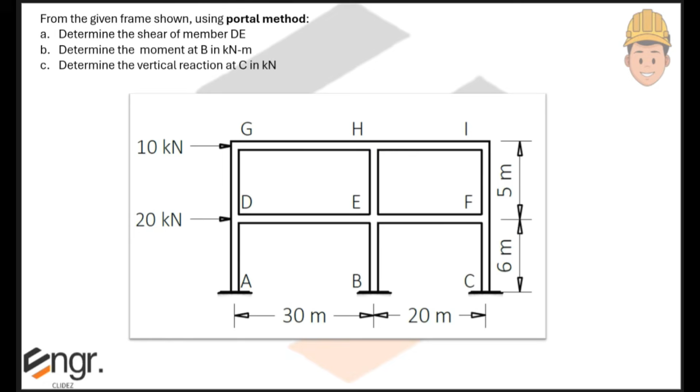So, before we discuss the conventional method, we will first outline the assumptions sa portal frame method. So, first, the bending moment is assumed to be 0 at the mid-height of each column and at the mid-span of each beam. So, di ba yung bending moment is 0 if there is a point of inflection. So, kapag sinabing point of inflection, yung assumption natin dyan, lahat ng mid-height ng column, then yung mid-span naman ng beams, lahat yan, lalagyan natin ng internal hinge. Kasi kapag merong internal hinge, yung bending moment 0, so that would signify a point of inflection.

So basically, sa lahat ng midspan ng beam, lalagyan natin ng internal hinge. Lahat din ng mid-height, lalagyan natin ng internal hinge. So kapag nilagyan natin ng internal hinge yung kada mid-height saka mid-span, then masosolve natin siya just by using static equations kasi magiging determinate na siya.

Then next, the total lateral shear at each story is divided among the columns in such a way that interior columns resist twice as much shear as exterior columns. So, itong mga nasa dulo, ito yung tinatawag natin na exterior column. Then, yung interior column naman, yung mga columns na andito sa loob. So, what if, sir, may 4 na columns? Let's say, ganito yung configuration. So, itong dalawa, yan yung exterior columns, tas ito namang dalawa, ito yung interior columns.

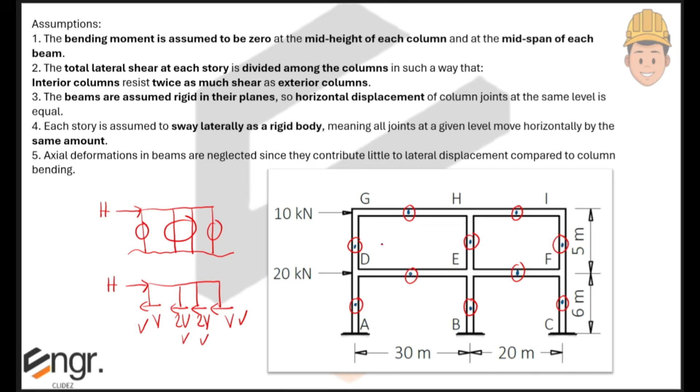So, one of the things that you have to remember, kapag magsosolve ka using portal method, yung first mong makukuha is yung shear value. But kapag cantilever na approximate method, yung first mong makukuha is yung axial force. So, yan lang yung difference nila. But nevertheless, yung assumptions na merong internal hinge sa mid-height ng column at sa mid-span ng beam, same lang. But yung behavior sa cantilever will be discussed in another video. Yung assumptions 3 to 5 naman, hindi yan necessary sa solving natin, but nilagay ko na lang dyan para malaman nyo talaga kung ano yung assumptions natin sa portal method.

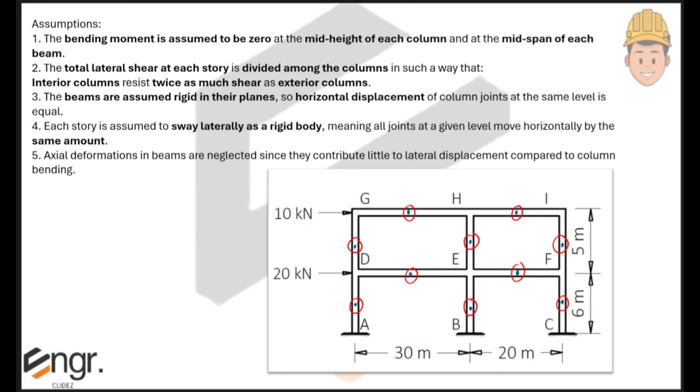Anyway, let's proceed sa solving natin. So yung gagawin natin is we will pass cutting sections dito sa first story, then next naman sa second story. Teka lang, may natanggal na internal hinge. May internal hinge dito, mid-height ng column EH. So, we pass a cutting section sa first story. We cut through the internal hinges. Then, sa exterior columns, merong V. Then, sa interior naman, merong 2V.

So, if we isolate the top part, then we can sum up forces horizontal. Now, we have 10 and 20, both acting to the right. So, positive yan silang dalawa, 10 plus 20. Then, equate natin sa lahat ng forces acting to the left. Naturally, yung shear forces would act to the left to resist the lateral loads. Kaya yung direction natin, ginawa na lang natin to the left. But what if yung lateral loads pa ganyan? Kapag to the left yung lateral loads, then yung shear naman will be acting to the right. Ilagay na lang natin yung tamang assumption agad. So, equate natin V plus 2V plus V.

Then, we can solve the value of the shear force, which is 7.5 kilonewtons. So, itong exterior columns, 7.5. Tas yung interior column naman, 2V yan. So, 2 times 7.5, that would be 15, yung shear force niya.

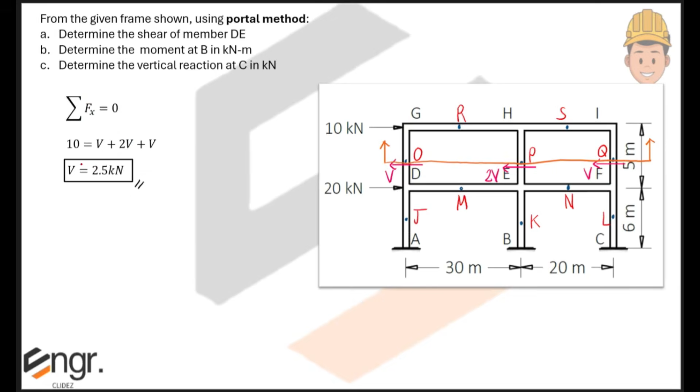Tas dito naman yung GH, distance niya is 30 meters. Kalahati ng 30 is 15. So we have 15 here. Then, sulat natin yung internal forces. Sa point O, we have our internal shear force as well as our internal axial force. Then, yung internal shear force na gagamitin natin is yung na-solve natin kanina. Diba, yung V dyan is 2.5 kilonewtons. So, sa exterior column yan, 2.5 kilonewtons.

Then, for the axial force naman, always assume at first na in tension siya. So, we draw the axial force away from the joint. So, ito yung joint O acting away. Yan yung axial force natin sa point O. Kaya yung label dyan is A sub O. Then, sa point R naman, meron ding internal axial forces. So, we have V sub R and A sub R.

Yung V sub R, assume na lang natin na upward. Anyway, hindi magmamatter yung assumption natin dyan kasi kapag negative yung result, it just means na mali yung assumption natin. Then, A sub R naman, since axial force yan, always assume tension. Bakit tension yung assumption? Tension yung assumption para kapag negative yung result, then alam na natin na in compression yung member. Then, always remember na internal hinge yung connections natin. So, if we transfer to another member, kailangan opposite yung directions.

Di ba ito yung upper left side? So, if we proceed sa middle, let's say ito. Let's say ito yung point R, ito yung H, ito naman yung S, saka P. So, opposite dapat yung direction kapag lilipat ka na ng bagong member. So, if AR here is in tension, then sa kabilang member, AR will be also in tension but acting to the left. Then, sa shear naman, if this is acting upward, doon sa kabilang member to maintain internal equilibrium, this must act downward. Sabihin natin V sub R. Ganyan din para sa kabilang sides.

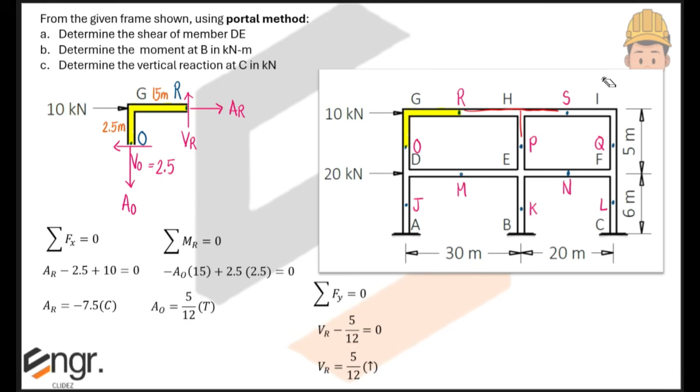Then yung shear force sa point Q, yan yung nakuha natin kanina, di ba ito yung V, ito naman 2V, tas ito V. Yung na-solve natin kanina for V is 2.5 kilonewtons. So that's why this is 2.5. Again when we are solving using the Portal method, yung first natin makukuha yung shear forces. Doon naman sa cantilever method, yung axial forces naman.

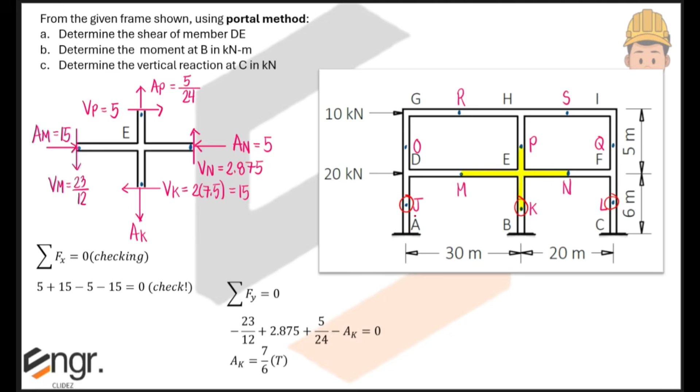So since alam na natin yung internal forces sa joints na to, joint J, joint K, and joint L, we can now proceed sa members dito sa ilalim. Essentially, yung AJ, BK, and CL.

So, analyzing member AJ, yung AJ na nasolve natin kanina is tension 7/3. So, acting away from the joint. Meaning, yung reaction at A will act opposite sa 7/3 upward. Diba? To maintain equilibrium. So, A sub Y will be 7/3 but acting downward.

Then, for the horizontal reaction naman, the shear force at J will now be acting to the right since to the left siya dito sa member DMJ. So, yung horizontal reaction natin sa point A is 7.5 but acting on the opposite direction. So, ito toward the right, ito naman toward the left.

Then, for the moment naman, V sub J will cause a clockwise rotation about point A. So, the reaction will naturally be counterclockwise. Diba? Clockwise from the shear force, yung rotation. So, yung reaction will be opposite, counterclockwise. 7.5 multiplied by 3, force times moment arm. We will obtain 22.5.

Then, sa middle member naman, yung nakuha natin na axial force sa point K is tension, 7/6. Tas yung shear force naman sa top is to the left. So, ditong banda sa member BK, the shear force is now acting to the right. Teka lang, may mali pala sa label ko. Ayan, ito dapat V sub K yan, ito naman V sub L.

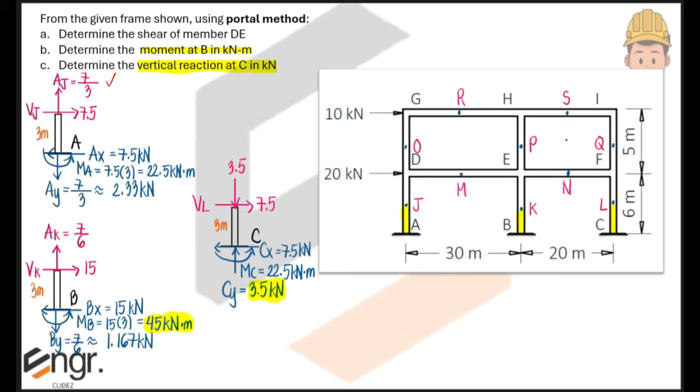Then to check kung tama yung sagot natin, we can sum up forces along Y and forces along X. So summing up forces along Y, we have 2.33 downward, then minus 1.167 din downward, plus 3.5. Pag inad mo lahat yan, we will obtain 0. And then summing up forces along X, we have 10 plus 20 acting to the right from the lateral loads. Then minus 7.5 times 2, dalawang 7.5, minus 15.

We still obtain 0. Again, we obtain 0 since yung 7.5, 15, saka 7.5, parang galing lang din yan sa shear forces na kinumpute natin kanina. So essentially, yung mas magandang checking talaga is by summing up forces along the Y direction. So kapag nag-0 yung summation of forces along Y, then rest assured, tama na yung calculations mo.

Unless na lang, nagkamali ka sa computation ng shear forces, which is yun yung initial na makukuha natin sa Portal method. So sa next video natin, i-discuss naman natin yung cantilever method.